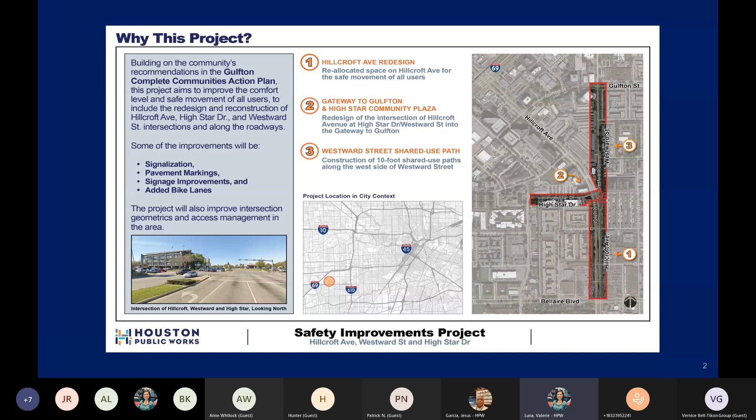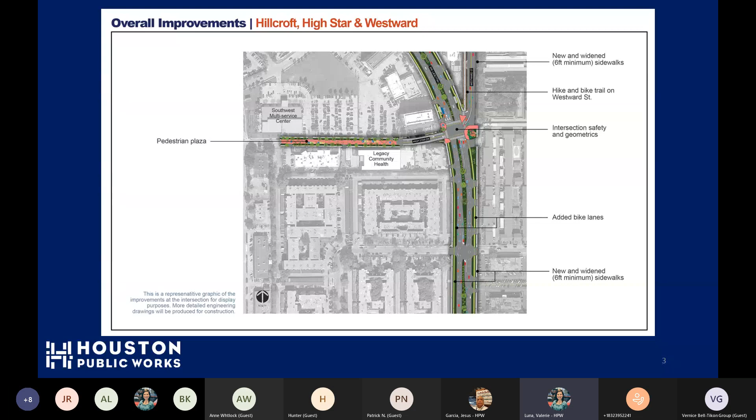Intersection improvements also included in this safety project are bicycle accommodations. We hope to one day see the extension of the bike lanes further north on Hillcroft and to grow the bicycle network for the Gulfton area. As depicted in this slide, you can see that we fully hope to have bike lanes further north, although they are not included in this project.

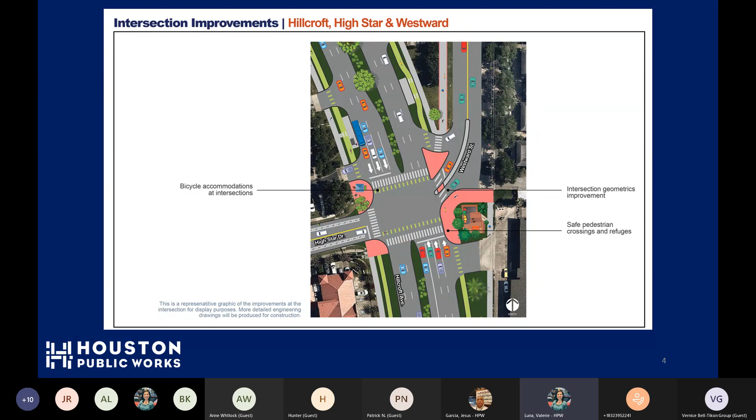Houston Public Works held a public meeting in September of 2020, which helped us better understand the community safety concerns, and we thank everybody who participated in the survey after. We anticipate construction to begin in early February and anticipate completion late summer of 2021.

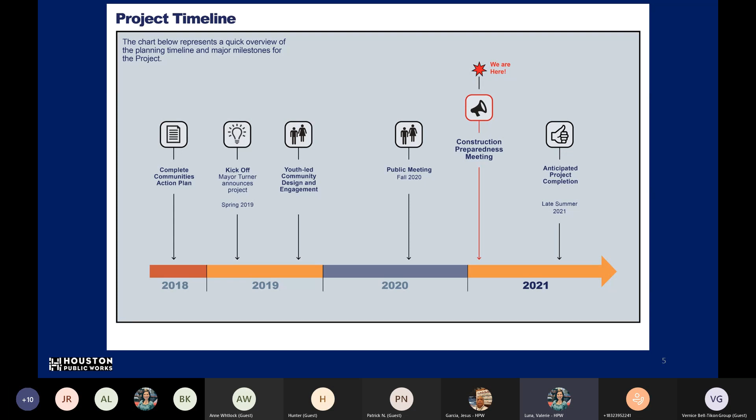Construction will have a total of 4 phases. First phase includes Hillcroft from Bellaire to Dashwood. Phase 2 will be from Dashwood to Clarewood Drive. We anticipate phase 1 and 2 to take an estimated 2 to 3 months, weather permitting. Please note that although phase 1 and 2 include the intersection of Hillcroft at Dashwood, the pedestrian signal is anticipated to be installed during phase 3 or 4.

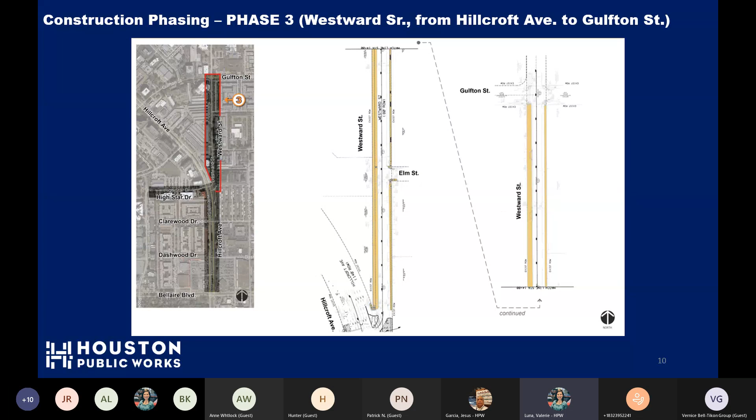Phase 3 includes Westward Street from Hillcroft Avenue to Gulfton Street. On the left, you will see our depiction of where phase 3 is, outlined in red. We will be constructing a 10-foot hike and bike trail along the west side of the street, a 9-foot buffer, and a 6-foot sidewalk on the east side of the street. On-street parking will not be affected by construction.

Phase 4 includes Hillcroft from Clarewood to High Star, Westward, and all of High Star. We will be installing 8-foot buffer space and bike lanes. With the potential help of outside partners, the buffer space could one day include a wide range of uses like landscaping, pedestrian lighting, artwork, and be a space for gatherings and community engagement. Please expect to see machinery and materials staged in the planned buffer zone during this phase. We anticipate to start phase 4 in May of 2021.

Our contractor is responsible for implementing a traffic safety plan and will monitor it throughout the construction phase. Our Houston Public Works team and the contractor will continue to monitor the implementation of the plan and make any necessary changes to ensure the safety of all users throughout construction. We understand construction can be uncomfortable, so we want to be mindful of everyone's travel through the area during this construction phasing.

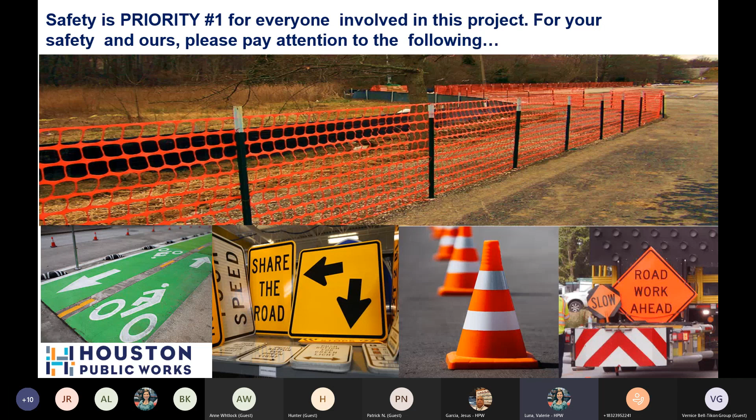When it is time for the contractor to start the work, we will be distributing door hangers with pertinent contact information in case you have any further questions or concerns. So please hang on to your door hangers throughout the project.

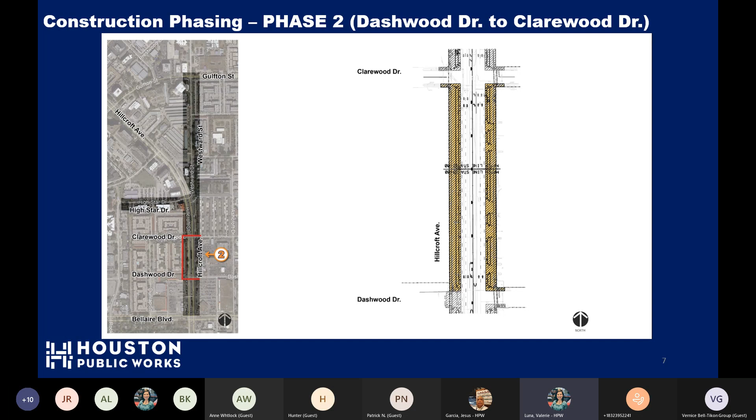So again, here is phase 1, Bellaire Boulevard to Dashwood. Phase 2, Dashwood Drive to Clarewood Drive. The final improvement product for Hillcroft Avenue. Another view of our final product.

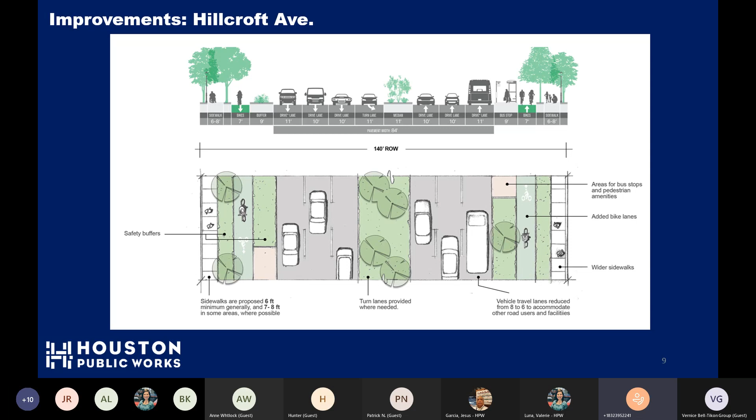I may have missed this, but is there a dedicated web page for this project if we're looking for more information, like a summary of sorts? There is, and it is located at the Planning Department website, I believe under their Vision Zero tab, and it will be updated with this information.

And in the past, they have kindly posted the recording of our meetings, which I will be asking them to do once again. So you'll be able to not only visit the YouTube channel, but also the Houston Vision Zero website to view the recording.